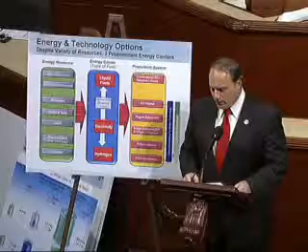Now, some of these fuels have some limitations. We are very excited about biofuels, and certainly, based on my agricultural-dominated congressional district, I join in that, but they have a limitation. We can't fully meet demand based solely on biofuels, if for no other reason because of land use requirements. We know that batteries have cost and weight problems. Let me illustrate this in the next slide.

There are different amounts of energy contained in different kinds of fuel. Madam Speaker, if you'll indulge me, just a brief discussion of a technical nature. Today, if I want to drive 300 miles, it will take approximately 72 pounds of diesel fuel. Now, if you take that amount of diesel fuel and wrap it into the fuel delivery system, the piping, the pump, and the fuel tank, the total weight of that onboard device is about 94 pounds.

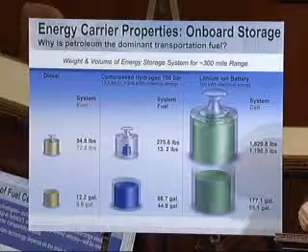If I want to do that with compressed hydrogen, the amount of hydrogen that I want to use contains 13.2 pounds. Now, why is that? That's because hydrogen, pound for pound, contains much more energy than does diesel fuel. It's an incredibly more efficient energy delivering fuel.

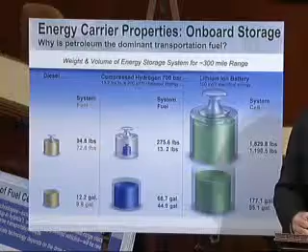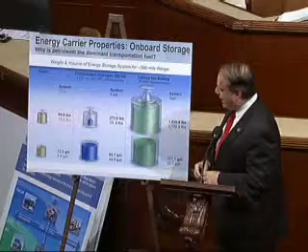But because it's a gas, it must be compressed, and so its tank will weigh more. The entire energy delivery system for a vehicle will weigh about 275 pounds. Well, that sounds like a lot more than the 94.8 pounds, but it's really only about 180 pounds heavier. That's about one passenger's worth. That's a very manageable technical challenge to engineers in the automotive industry.

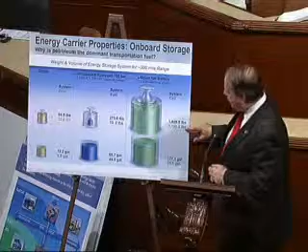But when we talk about batteries, it will take 1,829 pounds of lithium-ion batteries to allow me to drive 300 miles without recharging. The delivery system, the encasement, the battery cables, and the harnesses will weigh a total of 1,829 pounds, with 1,190 of that actually being the battery itself.

Now, that has a market value. There are urban uses for battery-powered vehicles, but long-range, high-torque, high-horsepower extended driving is not one of them. It is only through a high-density, high-energy fuel, in this case today, diesel or gasoline, and in the cars of tomorrow through hydrogen, that you can achieve that.

Lithium-ion batteries, technically, because of the laws of physics, will never get us to where we have to go across a broad spectrum of driving requirements. It is simply not physically possible. In order to do this, I believe, and many experts join me, we have to harness the power of hydrogen through advanced fuel cell technology.

Now, petroleum and hydrogen have two other advantages. These vehicles can be refueled every 300 or so miles, and it takes about 3 to 10 minutes to do it. A battery electric vehicle requires overnight charging with a high capacitance recharging system. That's fine if you have 8 or 9 hours to recharge your car, and there are many uses in urban America where that's possible, but not in long-range, high-horsepower transportation requirements.

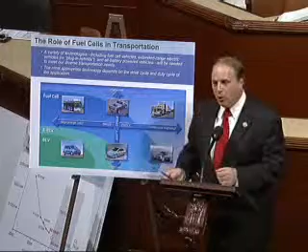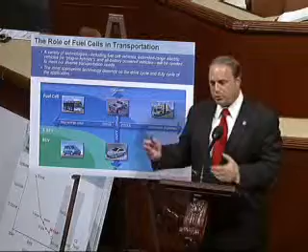Let's talk, on the next slide, about the range, about the requirements of driving as we see them today in the United States. This brings the technology back to the consumer. On this chart, on a four-way arrow, we talk about high loads. Those of us who come from farm country know that there's a lot of driving to be done agriculturally that requires heavy-duty pickup trucks. On the other hand, light load driving for those in a much more urban environment like Los Angeles, Miami, or New York City recognize light load small vehicles.

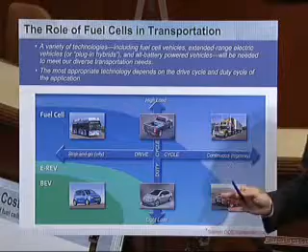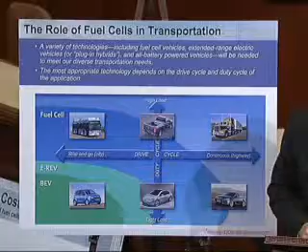Then we go as far as range - continuous highway driving down Interstate 90, up Interstate 5, or short burst driving as we go on errands from store to store. Battery electric vehicles perform very well in local lightweight driving, and they can do a great deal to lessen our burden on imported petroleum in that market.

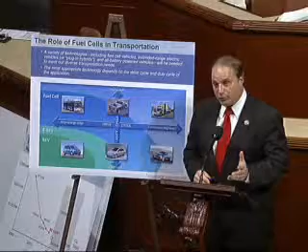Extended range electric vehicles can make that just a little bit better, but it's still about a 4-passenger car.

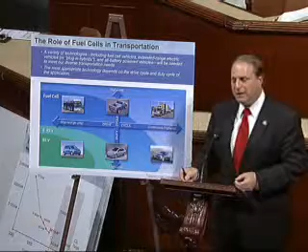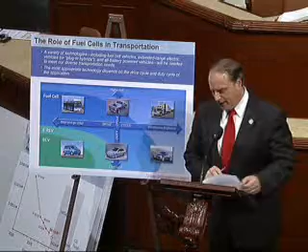Fuel cell vehicles are the only vehicles that will be able to meet consumer demand for long-range highway driving, load requirements like heavy pickup truck type requirements, and quick refilling time. Diesel fuel, for the near foreseeable future, is probably going to be the fuel required to move heavy buses and heavy trucks over long-range routes.

But imagine that they are a mere fraction of those billions of gallons of gasoline that we burn and import every year from overseas. There is a huge application for hydrogen fuel cells in meeting consumer demand for vehicles that have long range, high load requirements, cold operation, and quick refilling time. But can hydrogen fuel cell vehicles become a reality?

Let's look at the next chart, just where we were in the year 2000. There are 4 myths that are currently being discussed with respect to hydrogen fuel cell vehicles. One of them is fuel cells are too expensive and they're not durable enough.

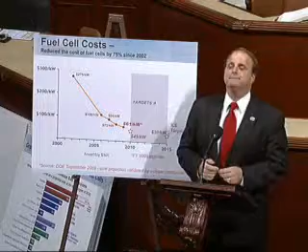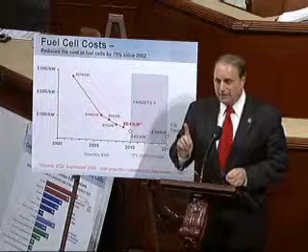The reality is the cost benefit of a hydrogen fuel cell is measured in something called dollars per kilowatt. You measure the output in a kilowatt. Now, just to bring this back to home, your average light bulb at home is 100 watts, so 10 of those turned on at the same time is 1 kilowatt. An Equinox extended range hydrogen fuel cell vehicle today produces about 120 kilowatts of electricity.

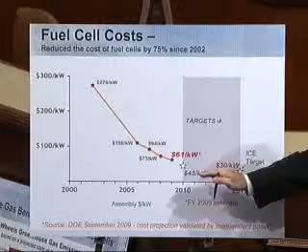Significant cost reductions in this measurement have already been made just in the past 10 years, from a plateau of $275 per kilowatt all the way down to today at 61 dollars per kilowatt, well on the way to the commercialized requirement of a 45 kilowatt vehicle, that's $45 per kilowatt. Just last week, the Department of Energy, in its hydrogen program, released a document confirming a current $61 per kilowatt in a 2009 projection.

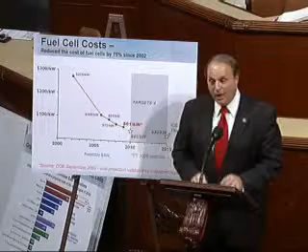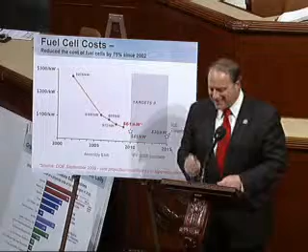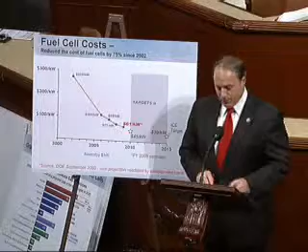As shown on this chart, this is a reality today. Cost will and soon are comparable to all other advanced technologies at high volumes of production, a high volume of production being 500,000 vehicles per year. It was an incredibly difficult challenge put forth by the technicians at the Department of Energy, and the goals have been met or exceeded as developed by major automotive manufacturers right here in the United States. In fact, GM is on track to release a commercial model that meets or exceeds all durability and cost guidelines by 2015. Myth 2, as shown on the next chart.

Hydrogen from natural gas is not an ideal source, and we don't have other options. Let's go back to chemistry class when we were in high school. Hydrogen gas comes from 2 main sources, either something called reforming natural gas or fundamental electrolysis.

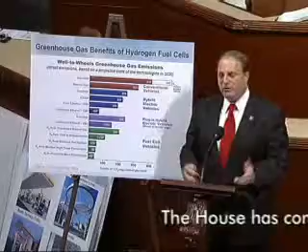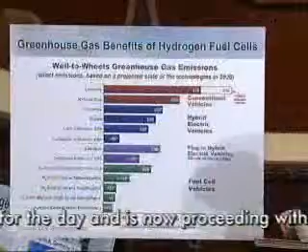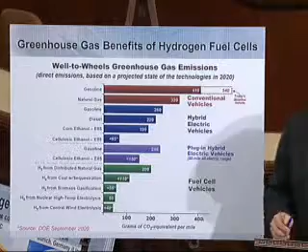If we just use and burn natural gas in a compressed tank, it's about 320. If we go to hybrid electrical vehicles, of which there are 4 major types - gasoline, diesel, corn ethanol, and cellulosic ethanol - we can get it down to about 65 grams. If we're talking about plug-in hybrids, today we have a gasoline hybrid that gives us a 240 gram per mile burn, and cellulosic ethanol can get it down to 150.

It is only hydrogen fuel cell vehicles that meet the emissions requirements required for us to move forward. If we take hydrogen...